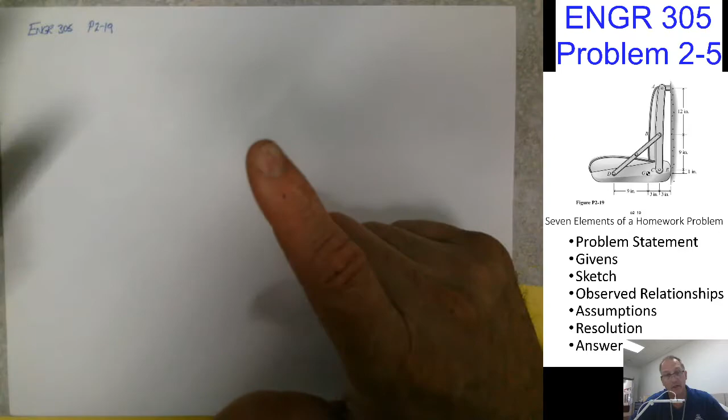In this one, I want to start with a free body diagram for the seat, because that's what we're always going to start with. That point drops a little bit, comes out. This is D, C. Sorry, that's my CG.

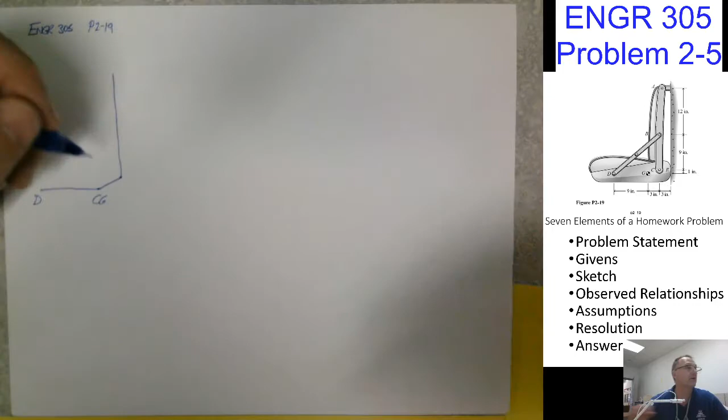Are those in line? I have to check those. No, there's a 1 inch difference. So I amplified that, but otherwise that gets lost. And we've seen on other problems how when that gets lost, it creates its own problems. So that's C, that's like that.

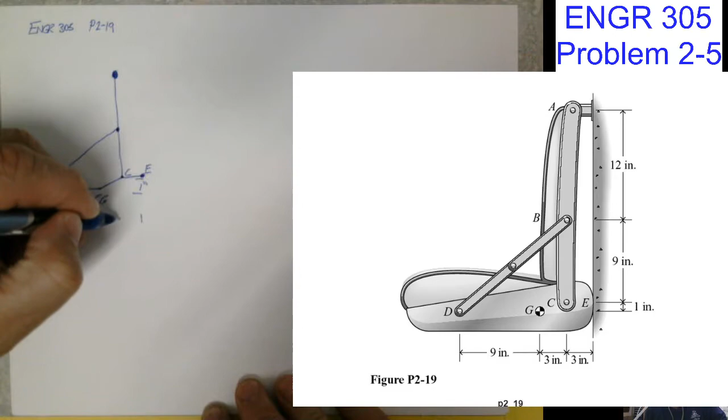And then I've got a point A here. And I've actually got one more point back here, which we're going to call, which the book calls E. And we can go back through and put in. I think the picture is important, that's why I'm taking the time to draw it. I think the picture is important because it has good information, like that little 1 inch in there. And then this is 9 inches here.

It would probably be easiest if we could just cut and paste and drop that onto our homework set. Do I need anything else? Yeah, I suppose I'm going to put 9 inches from B to E to CE, and then another 12 inches to the top, like that.

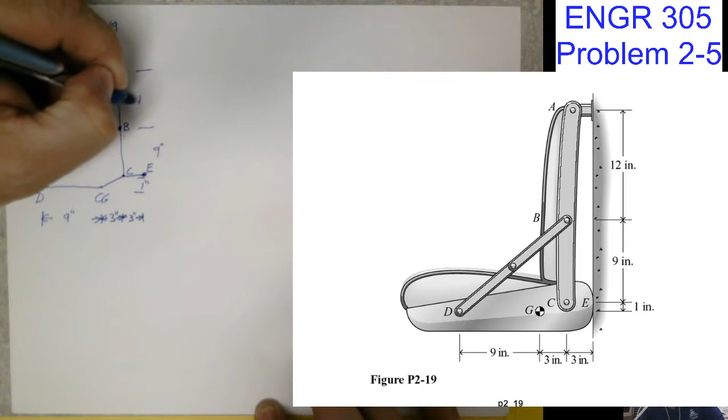Now I want to start working on this. If I want to find the internal forces, I think the easiest place to start is finding all the external forces. And so the external forces, really, it's a new diagram. It's going to look like this.

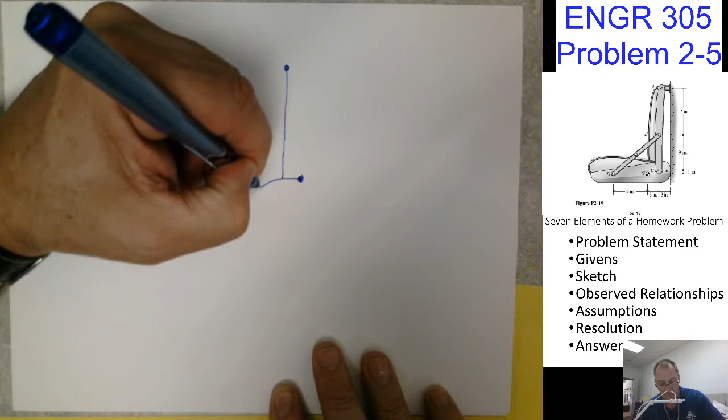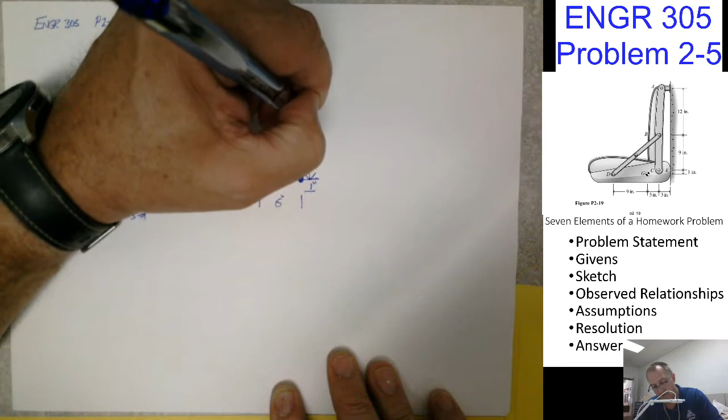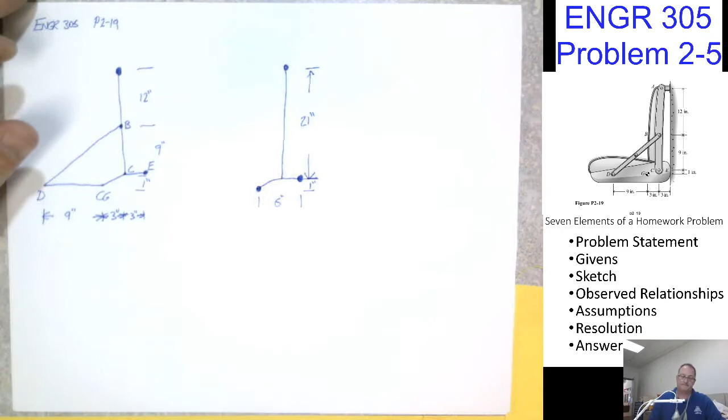Like that. And I can say that this distance is 6 inches, that this distance is 1 inch, and that this distance is 21 inches. Hey, remember earlier the other homework problem, I had to turn the light on? Let's do it again here. There you go. There you go. All right.

What forces do I have to deal with? Well, that's my weight force. And that's a normal force coming off the wall. And then I have this hanging force, and I'm going to draw it. It's going to be pushing up. And that's A in the Y direction. And I've got some other force. I'm going to draw it this way. I'm going to call that A in the X.

Now, here's a little bit of expertise showing up. N is acting this way. I can already see ahead. You know what I want to do? I want to write sum of the forces in the x direction. Well, I've already labeled x and y implicitly because that's my x. So put a coordinate system here. There's y, there's x. Sum of the forces in the x direction are equal to 0, equal to minus n plus ax. And there aren't any other things.

So I knew, because I know the normal force is going out, it can't be a tension. It doesn't work that way. You can't, it's a homework problem later, but you can't push on a rope, and you can't pull on a gap. It won't work. So I knew that equation was going to set up that way. I know that force is going to be in that direction, so I put it in the right direction to start.

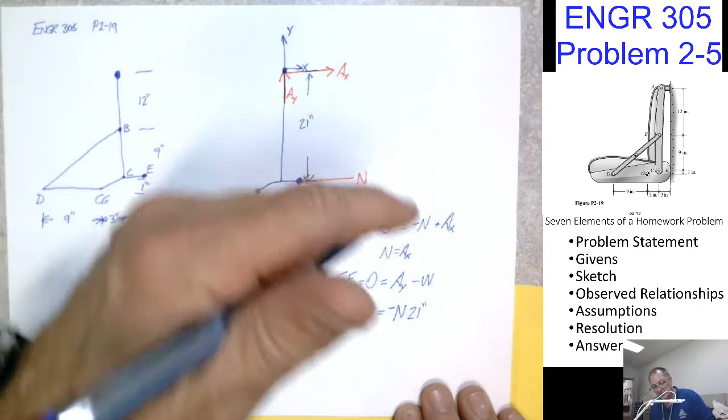from the normal force, and that distance is 21 inches. And w is going to cause it to go the other way. The weight force is going to cause it to go from x to y, so that's a positive. So that's plus w, and I need the distance from here to, and I didn't write that down. No, I go back to the book, go back to the figure. The distance from the CG to that line where A is, you're seeing it's at that 3 inches.

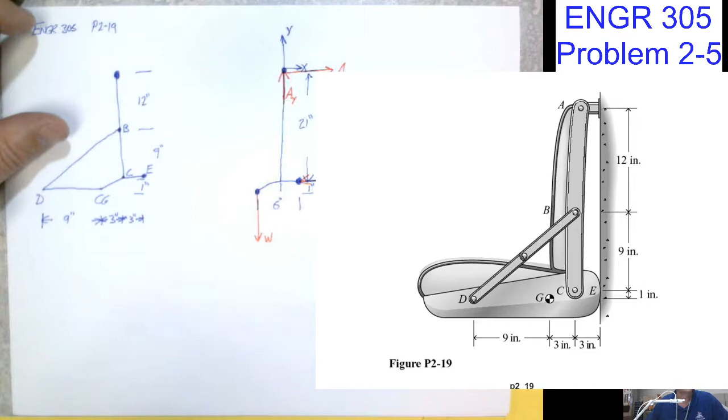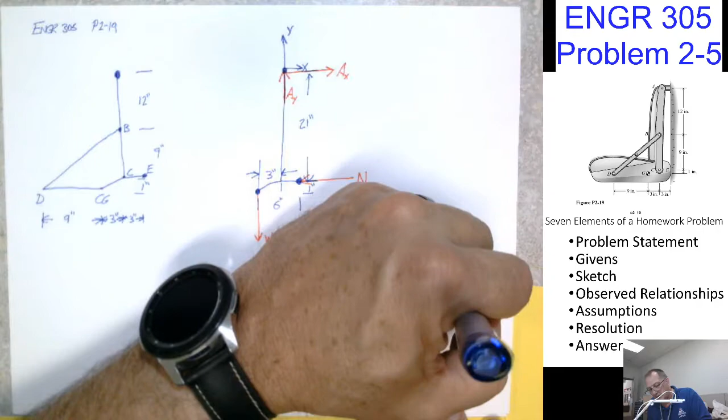So I'll put it on this figure, and write it in there, 3 inches. And now we have that N equals 3W divided by 21.

All right. So W equals, from our problem statement, that would be a given up here. Maybe we should have. The weight is equal to 30 pounds, right?

N equals 30 over 7 pounds equals 4. How about without a calculator? 4.28 pounds. All right, I got to pull out the calculator.

I haven't done it. I haven't gotten the new stuff yet. New calculator yet. Calculator, 30, enter, 7, divided by 4.2857. Okay, so I'm off in the 4th decimal place. Cut me a break. Really?

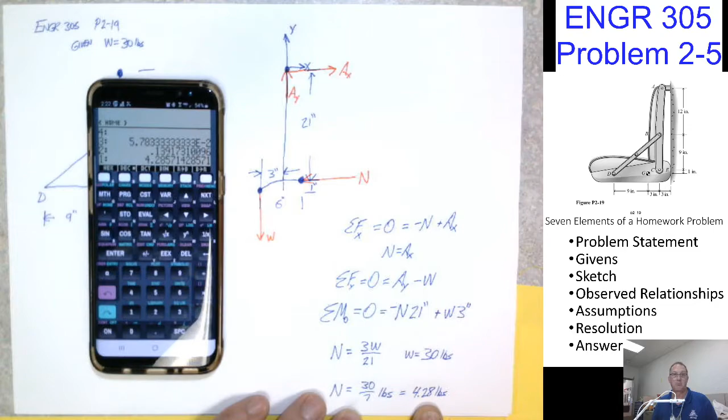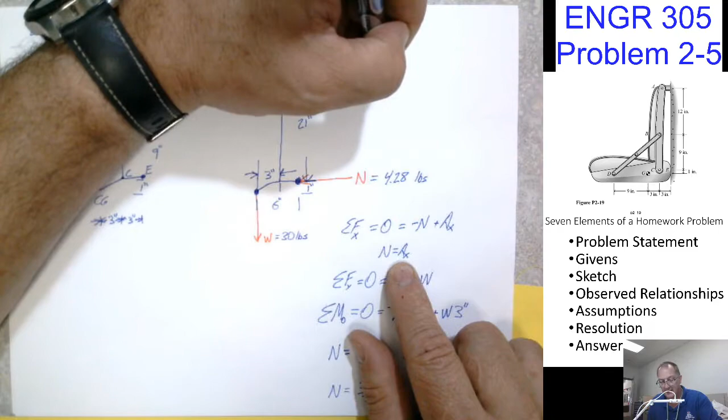Cut me a break. All right, so that's N equal to 4.28 pounds. W equal to 30 pounds. So now I know ay is equal to 30 pounds from this equation, and I know that ax is equal to 4.28 pounds. All right? Okay.

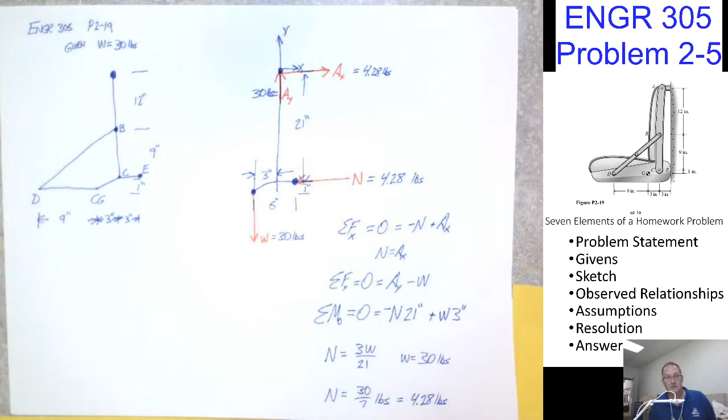If I have that, what's my next step? Well, let's draw. Now that I have all the external forces acting on the back, except for B, let's see if we can draw a new free body diagram for the back. So that's going to look like this. Points there, and there, and there, kind of. That's A and B and C.

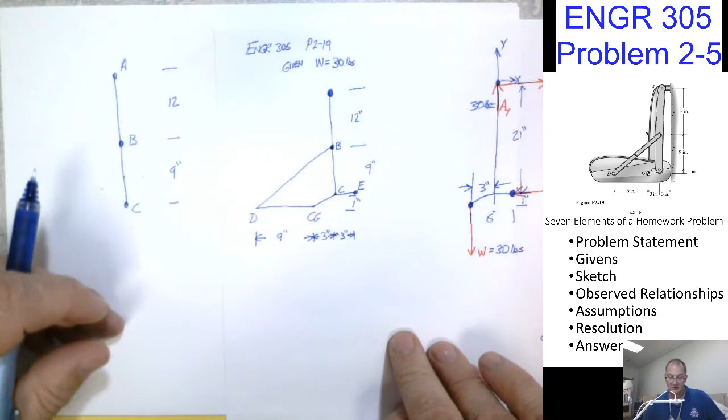And I know the distances. I even wrote them down from before. This is 9 inches, and this is 12 inches. And those are all in vertical alignment, so that's easy.

And then the forces that I'm going to have are this. I've got this force of 4.28 pounds. I've got this force of 30 pounds. I've got this force of 4.28 pounds. And I have one more force here, right? That is the tension from B to D. That's the tension from B to D. All right?

Okay, time to solve it. How do we want to solve that? How do we want to solve that?

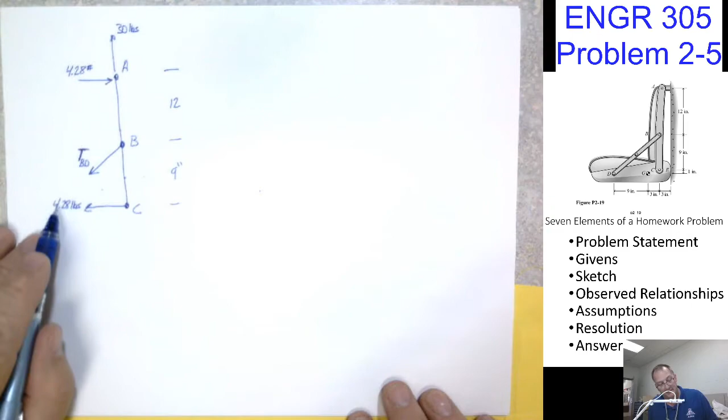Well, I would normally say we should take our moments about A, because that'll get rid of those two forces, and that does more than anything else. However, if I take the moments about C, I also get rid of two forces, because while this acts through A, it also acts through C. So either way, I'm getting rid of a 4.28, whether it's the C or the A, and I'm getting rid of the 30 pounds from the vertical, because they both act through A and through C. So either way, writing a sum of the moments equation really doesn't matter.

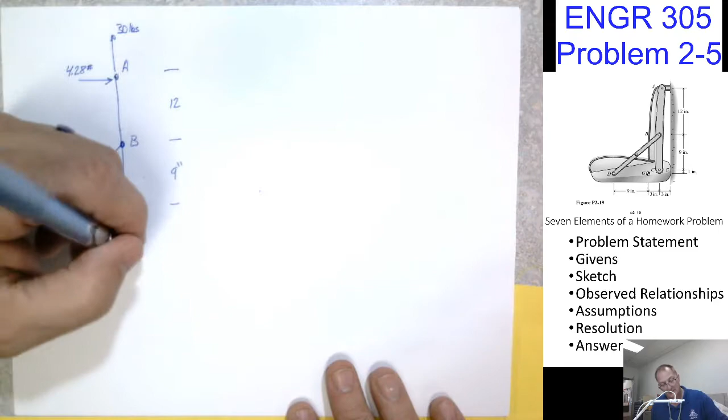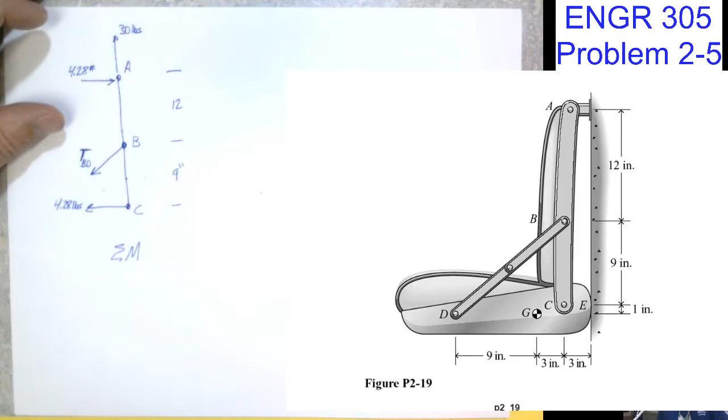How is that angle defined? And so let's take a look at this and see if there's any shortcuts that the geometry provides or dictates that we should use. And I'm going to say, if I look at that triangle, it's 12 inches across the bottom, and it's 9 inches along the top.

I don't think so. I think that 1 inch applies to D and G, which are on a line at that lower level. I'm going to say that angle is actually 10 — this is 10 inches. Because if I draw this out, my CG is here and point D is there, below that 9-inch level. This is the one more inch. So I think it's a 12-10 triangle, and that defines this angle.

If I know that angle, I am going to break this up into a vertical and a horizontal component, and I'm going to say — yeah, this is going to be, okay, so good.

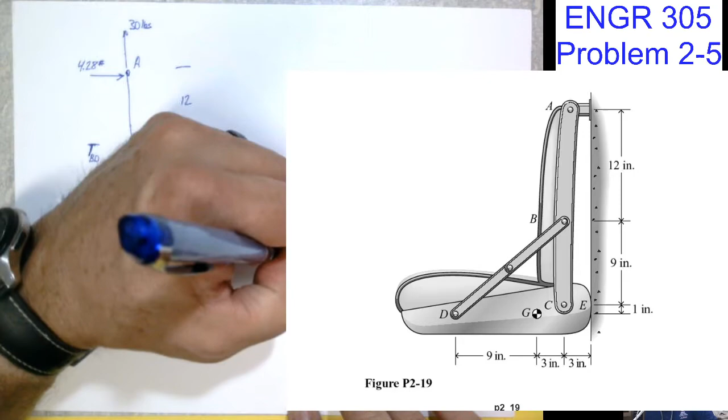The magnitude is the tension from B to D. And if I get that tension right, then that tension — this component, which is going to be the cosine of theta.

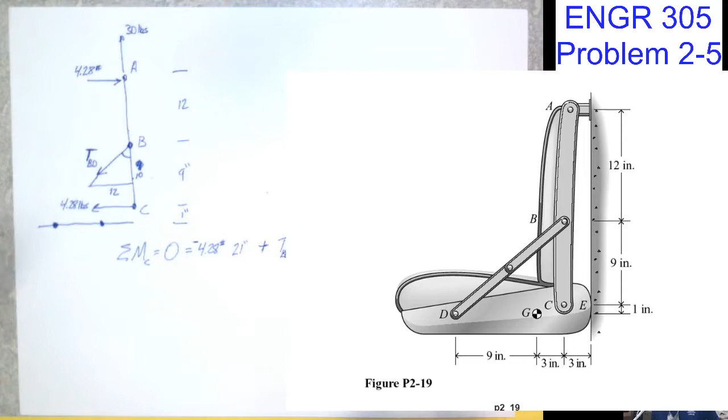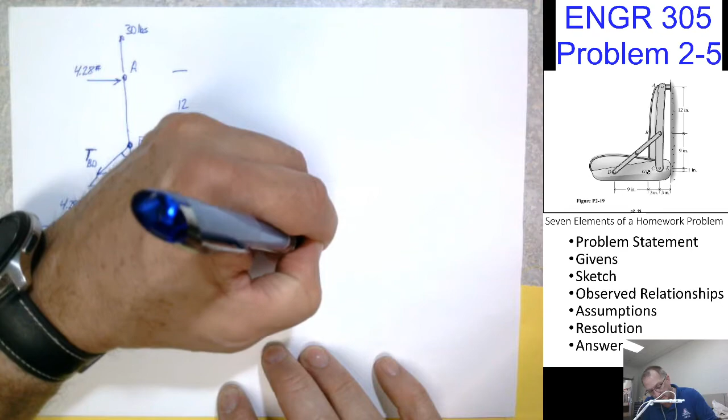Cosine of theta. No, hold on. Oh, you know what? I got to get this back too. Sorry, checking my geometry there. This is sine theta — as that angle goes to 90, this would go that way, and then I would want that sine term to go to 1. So that's sine theta, times that distance of 9 inches.

Now that angle theta is equal to opposite over adjacent. So tangent of theta is equal to 12 tenths, or theta is equal to arctangent of 12 tenths. I got to punch that up on my trusty dusty calculator — 12 tenths, that would be 1.2. That would be 50.2 degrees.

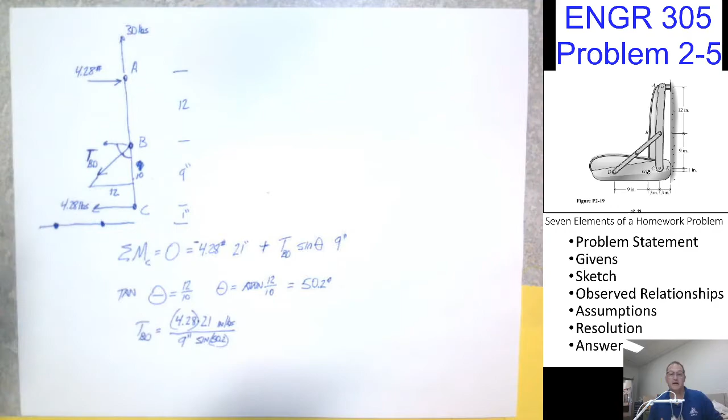And then I'm going to punch that back into this, but reorganize it. Tension from B to D is equal to 4.28 times 21 inch-pounds divided by 9 inches times sine of 50.2. Just for clarity there — oh, turned off the calculator. Here we go: 4.28, enter, 21, times 9, divided by 50.2 sine. And I have 12.9986 pounds. Oh, really? 13 pounds.

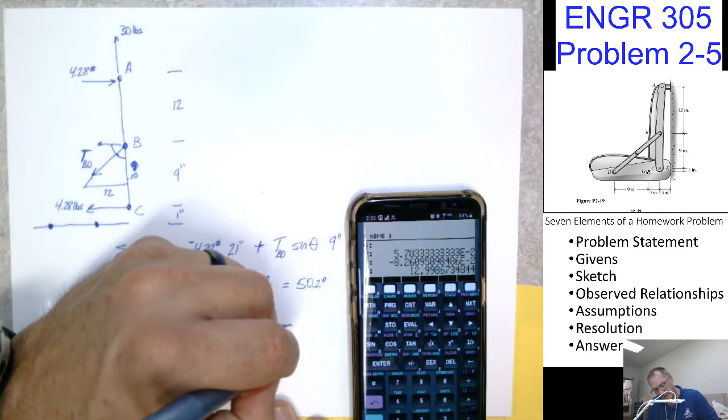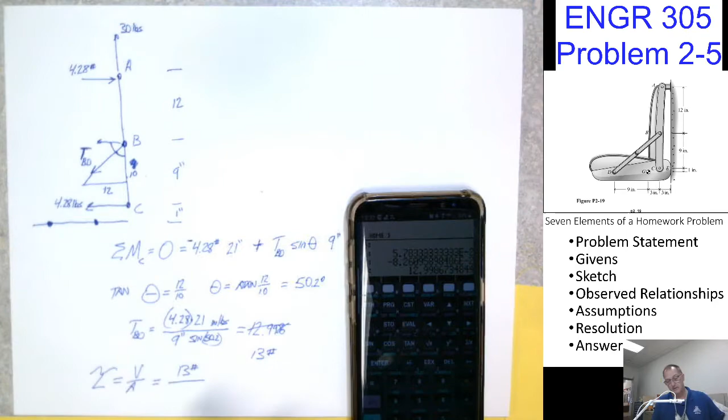So now my shear — the whole point of the exercise — shear is equal to V over A. Shear stress is equal to the shear divided by the area. 13 pounds is my load. The area, you remember all the way back to the problem statement? We should have maybe put that as a given back on the first page. We'd have to go back to our problem statement.

Cross section of a 3/8 inch diameter pin. All right, so given it's a 3/8 diameter pin, area is pi times 0.375 squared — that's the diameter, not pi r squared, that's pi d squared, so I got to divide it by 4. So it's V, the shear, 13 pounds, divided by the area, pi d squared over 4, and that'll get me that answer, which is 117.8, 118 psi.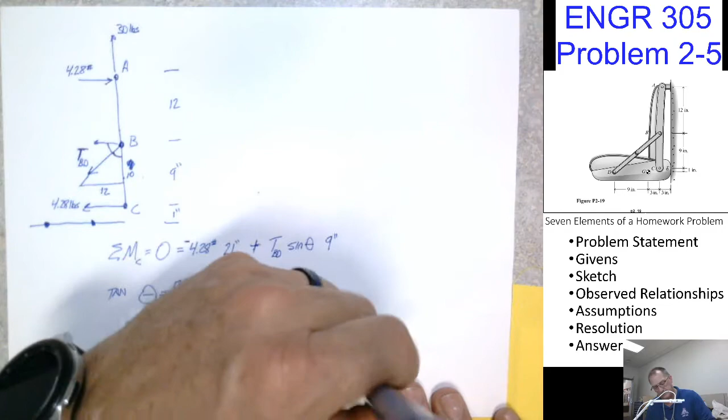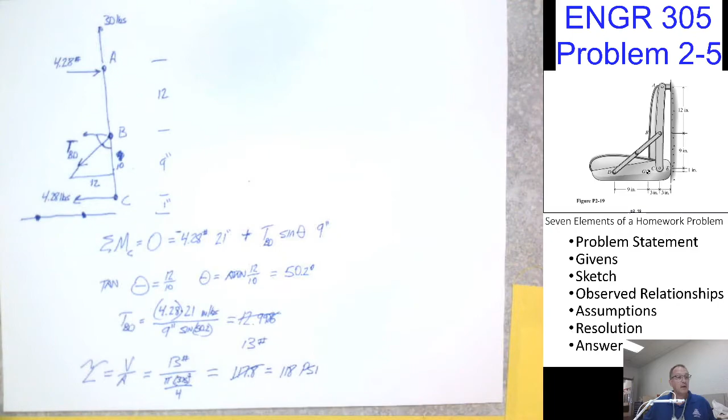Now we should put that in context. Big force, small force — am I worried about that pin breaking? No, that's actually very small. We could actually handle that with a plastic pin, but this is only supporting the weight of the seat. No one is sitting in it.

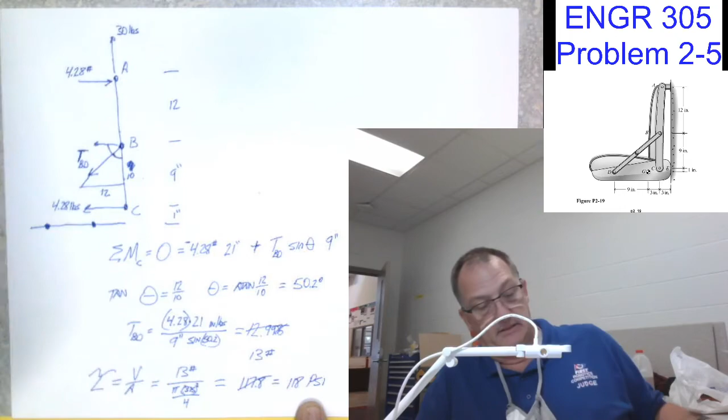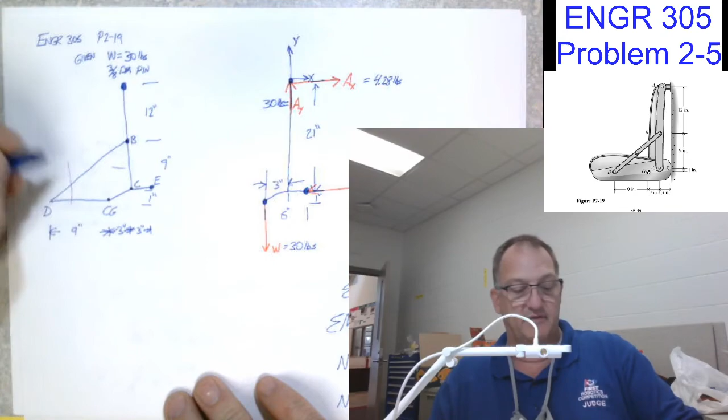And if we put someone in that seat, they've got the CG 3 inches out. No, no, no — you put someone sitting in, that CG is going to move out farther. The CG of the person might be 8 inches away from the seat, might be farther. If you've got someone like me, right now, I'm going to slump — well, that moves that CG farther away from that point C at the back that we're worried about. So that is not a very high load, but we're not talking about supporting any load yet. We're just talking about supporting the seat itself. So there you go.